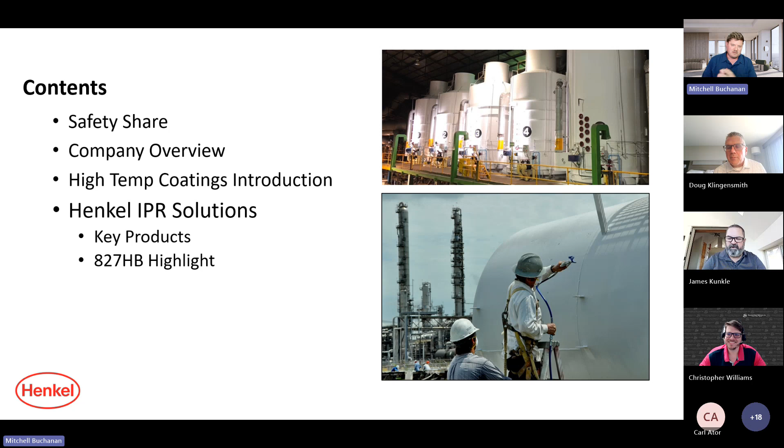So we'll start with a quick safety share, talk about who Henkel is, because you guys probably know Henkel as Loctite, but you don't know Henkel as coatings potentially. So we'll talk about why and how, and then we'll go through some generalizations on high temperature coatings and some of our key solutions that we can provide you as an asset owner.

So I always like to start a meeting with a safety share. It's a habit I picked up when I was part of Huntsman. As Peter Huntsman always said, our license to operate is being safe. I don't know if you guys follow the news, you've seen some tragic incidents, including fatal incidents over the past couple of months. So one thing we can all relate to, right?

June is PTSD Awareness Month and May was Mental Health Awareness Month. There's the National Alliance on Mental Illness, NAMI, lots of stats on there, adults, children, adolescents, right? This is something we should all talk about and be open. So how can we help each other, talk to each other, remove the stigma, right? If you have a broken bone, you're going to go to the doctor.

Just had the first one of those in my house last month, for my kids, and it's the same thing, right? If you have a mental illness, bad anxiety, depression, it can be really anything. Doesn't have to always be super serious. It can just be something that's affecting you maybe a day, a week, a couple of months. One thing we can do to help each other be the best versions of ourselves is show up for each other, be open to each other. If one of your associates, colleagues, boss, or subordinates is having a bad day, don't jump to conclusions, and try to make everyone move forward together.

So who are we, and why Henkel now? Henkel made two major acquisitions in this market in 2024, closed and fully integrated now. We're all Henkel employees now legally, but they bought Critica Infrastructure, so Clock Spring NRI Pipeline, and they bought Seal for Life Industries. Seal for Life, the main products we're going to be talking about today, was a coatings conglomerate focused on field joint coatings and infrastructure coatings.

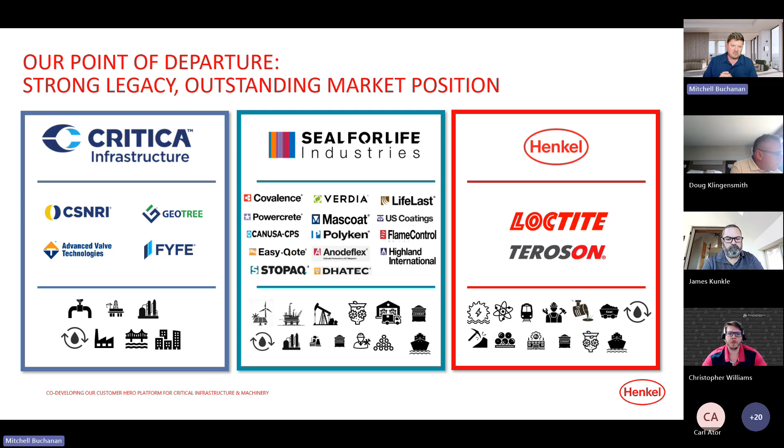Our shared vision is to build, maintain, and protect your critical infrastructure, and we're now part of what we call Infrastructure Protection and Repair. So Henkel IPR, if you see that around, that's Jim and I. We are the coating specialists and asset integrity specialists within Henkel.

When we talk about common coatings, this is not by any means an all-exhaustive list of different chemistries, but it's good to get a baseline understanding of how this all plays into high temperature, because not every solution is going to be the correct solution for your asset. And while something like epoxies are ubiquitous and everywhere, used all throughout every industry in our daily lives, they're not the solution for everything, right?

So you've got major classifications being organic, so carbon bonds, and then you've got inorganics like zincs and different metallizing or certain silicones. And then you have hybrids where they're combining multiple technologies, whether that's an inorganic or an organic—something like organic zinc would be an example of this, right? You've got an inorganic filler with an organic binder, or modified polymerics that we'll talk about a little bit more.

Also, with the carriers and the types of coatings in your applications, this is very important when you're talking about: can this be airless sprayed? Does it have to be plural component sprayed? Is it heated? And that gets into 100% solids coatings versus solvent-borne coatings.

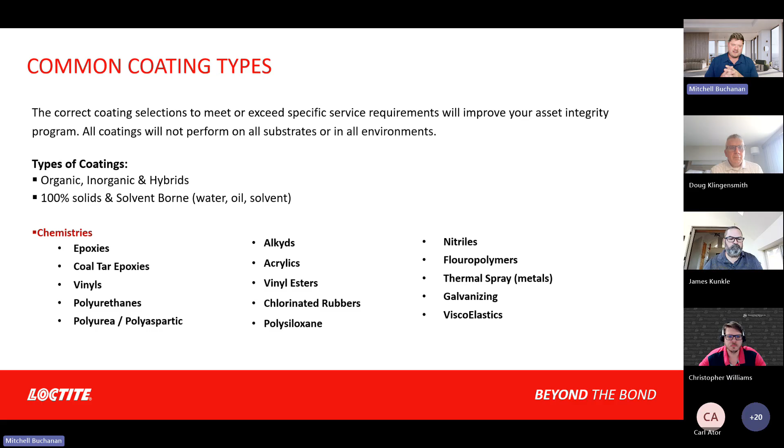So when we look at temperature, how do we classify high temperature coatings? This is the Mitch version of this, right? Someone probably has different definitions, but this is how I think about it. Different chemistries are going to peak at different temperatures, right? Of note, because I've included it in the first three sets there, would be epoxies, right?

Epoxies, ubiquitous organic coating. Your basic epoxies, like your JB Weld type two-component epoxy, your Mercaptan Cure epoxies, are going to typically have a maximum service temperature around 250 degrees Fahrenheit. You get into the bisphenol F and Novolac epoxies, and most of those are going to have a continuous operating temperature, especially for immersion service, around 350 degrees Fahrenheit.

And then you get into the specialty multifunctional organics, like BMI resins, multifunctional epoxies, so glycidylamines, and then cyanate esters. Those multifunctional epoxies, and other different chemistries, the esters, can reach continuous operating temperatures of 300 C. A lot of organics, and you'll see it thrown around a lot, that organic coatings top out around 180 C or 200 C. In coating space, most coatings that's pretty true because viscosity becomes an issue, right?

But if you're doing plural component type coatings, or you're looking into composite repair type stuff, like our high temperature pipe wrap, those are organic resin binders, and they're going to have 250 to 300 C continuous operating temperatures. And then this is also where you're in this 550 Fahrenheit range is where your silicone hybrids are going to fall, silicone alkyds, silicone acrylics.

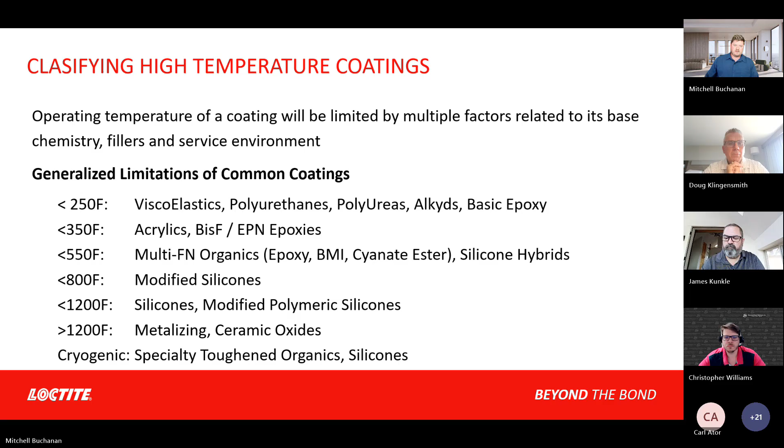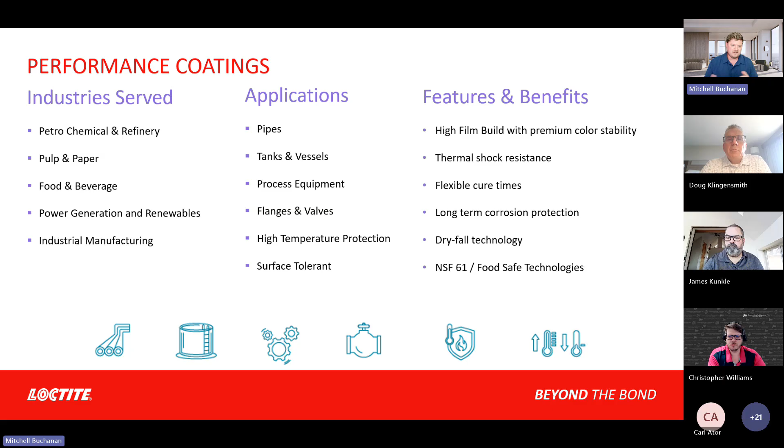So kind of covered this, but one of the big things: high temperature, 1200 Fahrenheit, you're going to need protection. CUI is a major concern here. The corrosion sweet spot, you hear 120 to 320 Fahrenheit for corrosion under insulation.

That's when you're getting rapidly accelerated rates of corrosion. Above 320 Fahrenheit, the water typically flashes off very quickly, any moisture entrapped in the insulation. Now it will still maintain, if it's absorbent insulation like mineral wool, it won't fully dry out typically, but you're not super worried about corrosion while the equipment is operating above say 350, 400 Fahrenheit. But in shutdown, startup, cycling, you get below that 300 Fahrenheit, and now you're back in that rapid corrosion environment.

And then dry fall is extremely important. We have solutions into this market that are dry fall coatings and can also be hot applied. So as an asset owner, especially if you're doing kind of an overcoat type situation, just trying to stay ahead, preventative maintenance, you can do these applications without setting up tons of containment, without having to do tons and tons of abrasive blasting. It can save you, as an asset owner, significant money, especially if you stay ahead of the corrosion and are doing preventative maintenance.

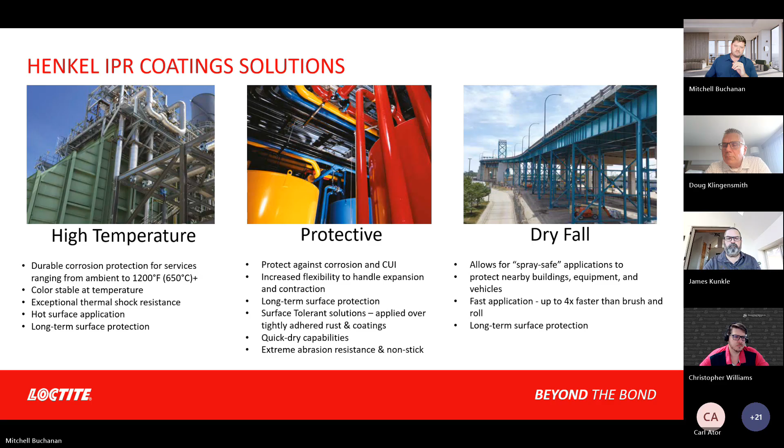So some of the products that I would like to kind of highlight today, and then we'll do a quick deeper dive on the Highland 827, which is kind of our workhorse into this high temperature space.

So Mascoat insulative coatings, 350 Fahrenheit. It's a high temperature for an acrylic coating. It's a specialty acrylic binder and allows it to have continuous operating of 350. Really, you can get to 375 comfortably, but once you get above that, you start running the risk of the heat getting reflected back in and creating a scenario where now you're at 425 or so. And at that temperature, the acrylic binder will start to harden and delaminate.

So that's the temperature limit of that acrylic binder. But it is a high temperature for an acrylic. Your standard house paint acrylic latex is not going to go up to 350 Fahrenheit.

When we look at the pipeline industry, most transmission pipelines are going to be below 100 C. There are some that are going to be in the 125 up to 150 C. So Canusa HBE-HT or Powercrete R150 for your ceramic modified epoxies, these are going to be high temperature pipeline coatings for AROs.

Into the chemical containment and CUI coatings, you have the single coat, high build, Gripline 6700 HB, great for hot caustic service, up to 20 mils in a single coat, and so can save yourself a lot of money in processing if that's all the amount of temperature you need.

And for that one, your immersion service, depending on the chemical, is going to cap out at 300 or 350 degrees Fahrenheit. Dry heat is going to be 450 Fahrenheit. So this is an epoxy Novolac type chemistry.

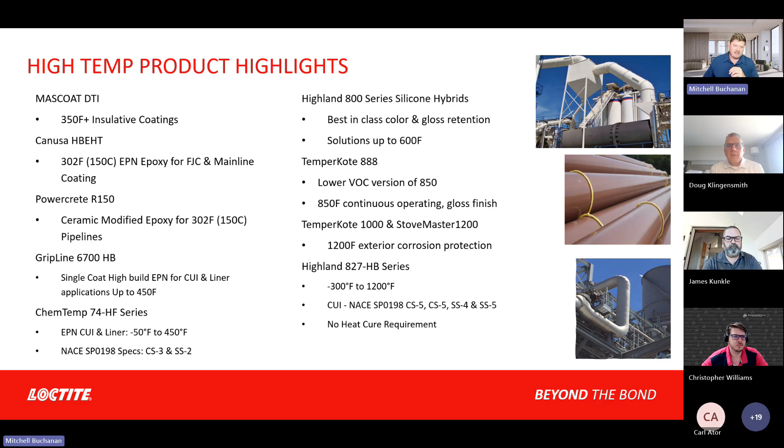And then we get into the highlight of the day, which is going to be our Loctite 827 HB. Negative 300 to 1200 Fahrenheit, excursions up to 1500 Fahrenheit, meets various SP0198 CUI specs. And we have significant, lots of testing on this product for scribe creep and salt spray, thermal shock resistance, CUI testing, very heavily used on continuous operating, like the firing drums at asphalt plants, exhaust stacks, and then CUI applications where you are insulating this equipment for energy retention, but it's still running very, very hot. And so you have to protect against CUI.